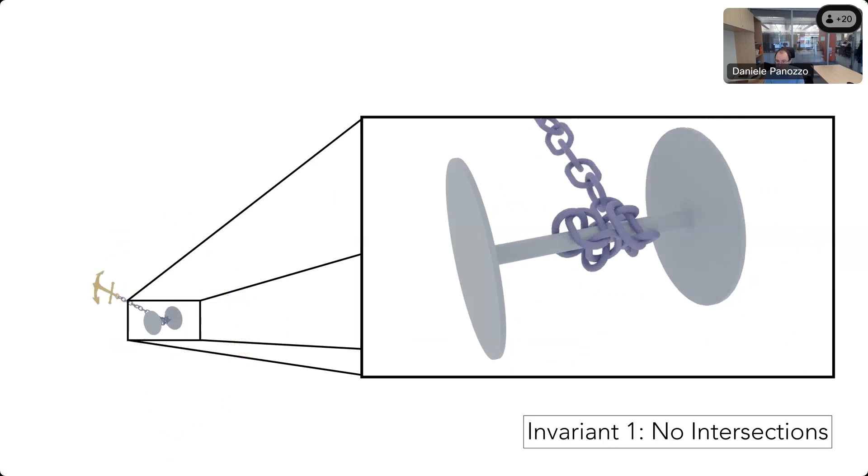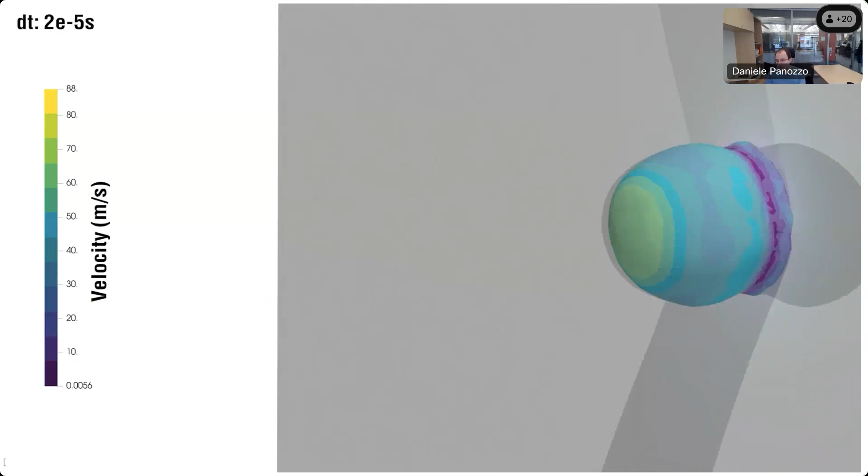The second thing is, for example, in this case, where you have this ball that hits the wall at high speed, there are very large deformations. Another thing you really want to make sure is that the geometric map of every element stays injective, or elements do not flip. So this is the second invariant.

And also in these simulations, what you're seeing here, and every simulation you see in this talk, we actually have a formal guarantee that elements cannot invert, even accounting for floating point rounding, and even if they are higher order elements.

The reason I want to push this is because there are many applications where this would be useful. This is something coming from the medical school at the University of Pittsburgh. This is an implant used to support human tissue. And here it's a simulation of this implant, which is sort of like this interwoven collection of fibers.

But what's happening here is that we're not using reduced models. This is a fully volumetric simulation where every individual rod is tetrahedralized, and the interaction between the fibers is figured out at runtime by our contact model.

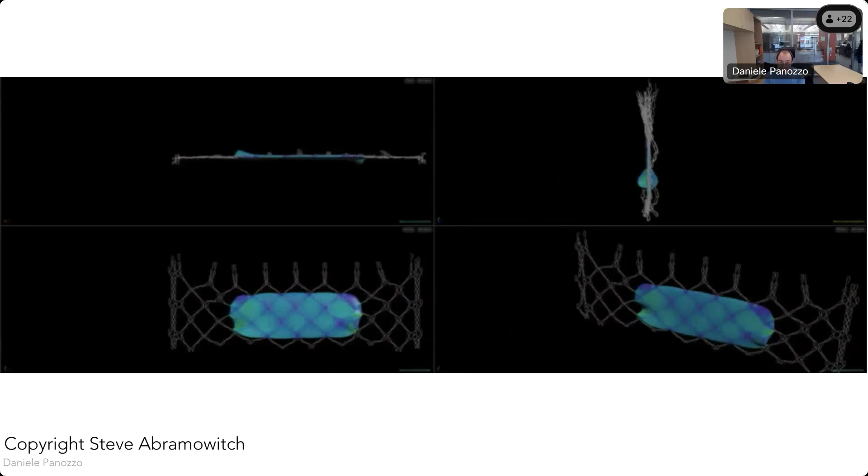The reason I care about this is because now, if we want to simulate, for example, how this implant interacts with soft tissue, we can actually have solid tissue, and now suddenly we can simulate the interaction between the two. No shortcut taken here. Accuracy is pretty high. I'm going to describe this in a second.

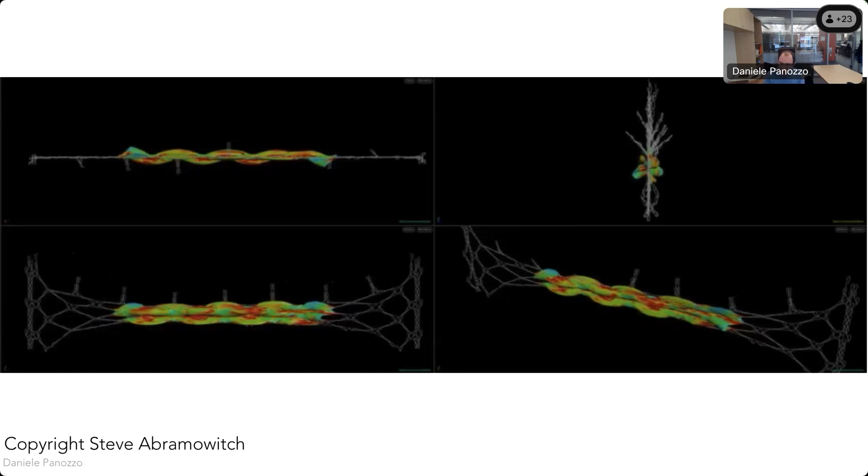The curious thing here is that, of course, it takes a long time. This simulation runs for days to simulate this expansion. One very interesting thing is that it turns out that in this specific simulation, the actual material property of the fibers is not so important. Most of the interesting behavior here really appears from contact. So it's a purely geometrical characterization of the material.

Here is another one. You see that we're going higher and higher in the craziness of scales. This is a simulation of the optical nerve of a pig under expansion, being slightly expanded. The way this was reconstructed was by taking a CT scan of an actual biological sample, identifying fibers, meshing every fiber as a tetrahedral mesh, and then simulating the interaction between all of these.

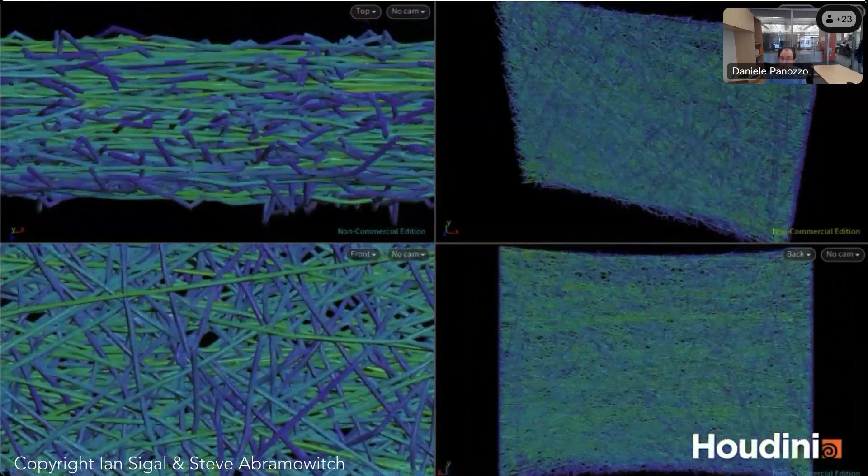Surprisingly, the simulation here matches the displacement curve measured from the Instron machine by less than 20% error, which is kind of remarkable given the complexity of the scene. This is an example of a material that is very hard to model with a continuum model, while it's surprisingly easy to model with such a system—if you have a way to model all the interactions happening here and deal very reliably with all the possible inverted elements or contacts appearing in there.

This is a simulation done with nonlinear elasticity, Mooney-Rivlin, and it takes, I think, a couple of weeks on a single workstation to run, just to give you an idea of the time scale. And this includes everything: mesh generation and simulation.

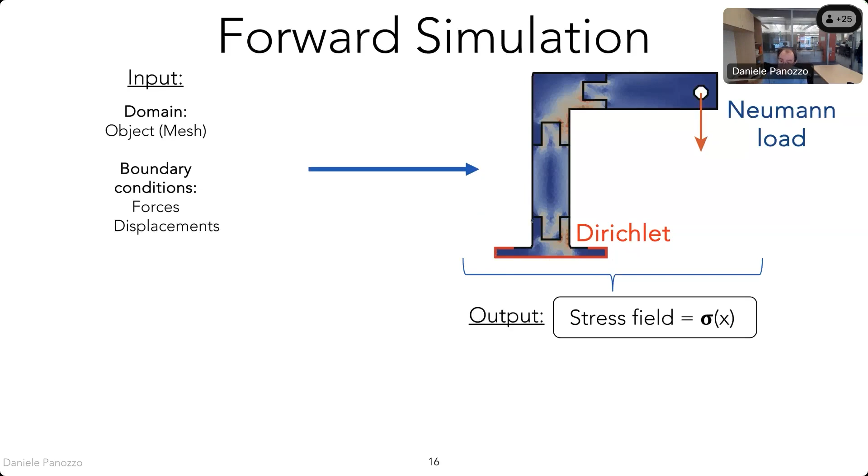Robustness is interesting not only for direct simulation, but also for solving inverse problems. Here we have four pieces, the one at the bottom is attached to the floor, and we have a load on the right. What I'd like to do is make it stronger, meaning that instead of just computing stress in a forward simulation, I want to figure out the different shapes so that stress is minimized. To formalize this, I want to minimize max stress, which can be relaxed in some way, for example using a p-norm as a smooth replacement.

Everything I've shown up to now, handling of contact, handling of inversion, nonlinear elasticity, needs to be differentiable for this sort of application to be possible, so that we can optimize things like max stress, which depends on the result of a physical simulation. So this is a PDE-constrained optimization, or an inverse problem, and everything I discuss today is going to be differentiable.

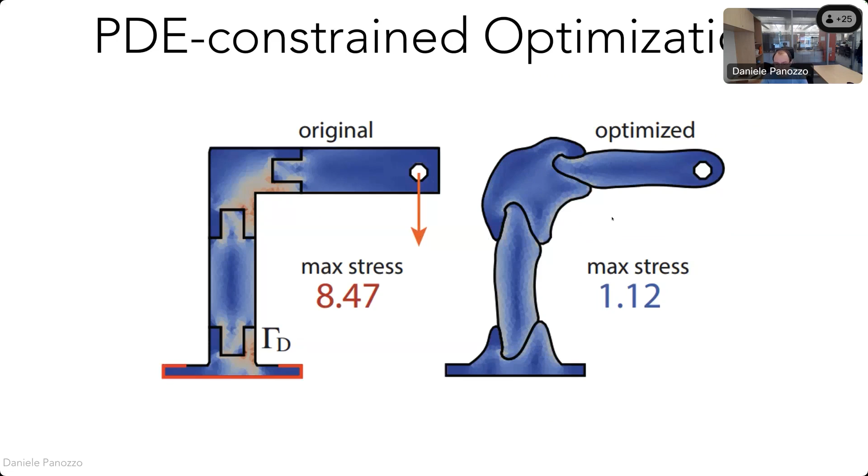What you can do with this is a lot of interesting things. For example, here you see that the interlocking between these pieces gets automatically optimized to become more organic. They start to look a little bit more like bones, which isn't a surprise, since corners tend to attract stress.

This can lead to measurable improvement in components. So this is really, if you want, an alternative to doing topology optimization, where you don't need to do thresholding, which introduces unbounded errors. Instead you can honestly optimize by solving your full space finite element problem and then optimizing the shape of your domain.

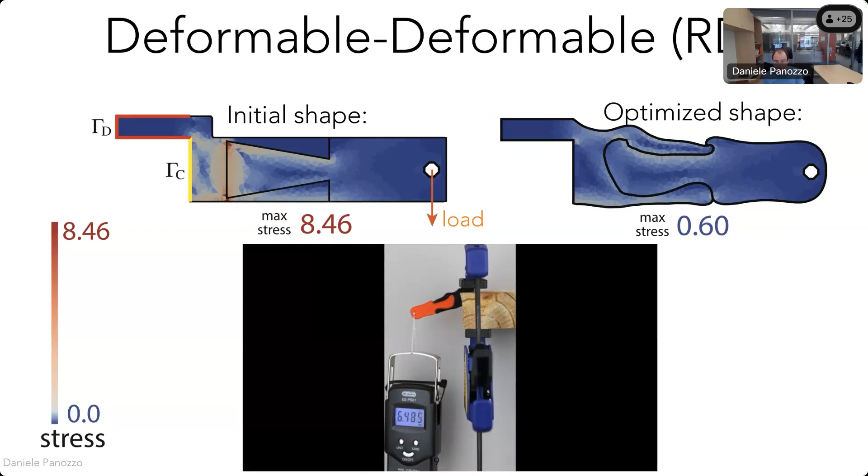Here are some examples. This is an optimization in 3D, just to give an idea of how the optimizer proceeds. It's trying to minimize max stress while the degrees of freedom are the geometry of this model. This is a full-blown 3D simulation with quadratic elements and nonlinear elasticity.

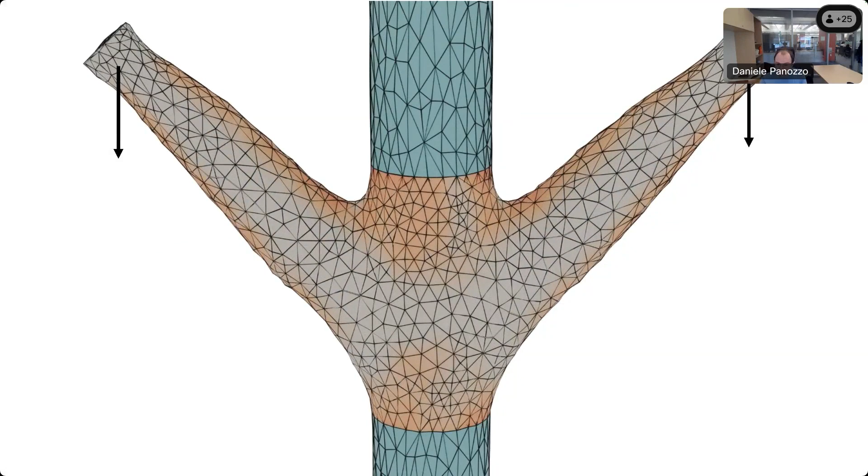Here is an example of optimizing a joint between two pieces under load, and you see that the piece nicely adapts to the other piece, trying to get rid of corners so as to reduce stress. If you want to do this at larger scales, you can imagine using geometry to control mechanical properties.

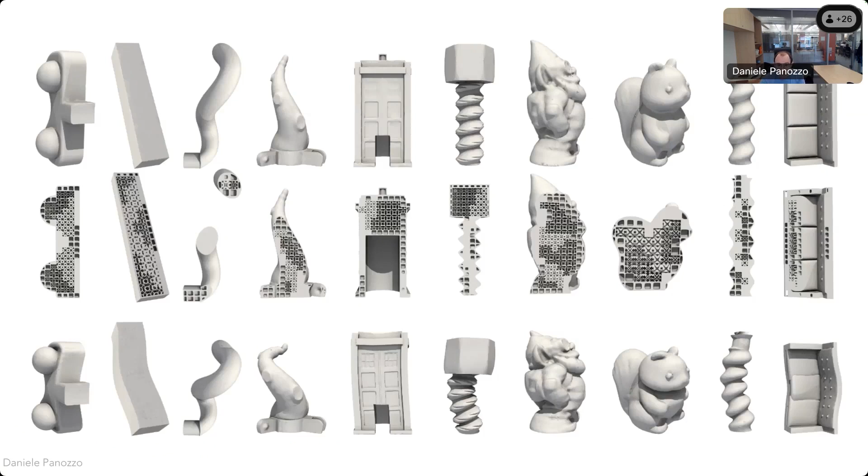We have possibilities to do this in 3D, so we're interested in solving this problem in 3D, and we're interested in solving it when time is present. So here you see a forward simulation of this block falling down, and the colors are von Mises stresses in the block. The goal is to see if we can minimize stress not only in one configuration, but over the entire time rollout of a simulation.

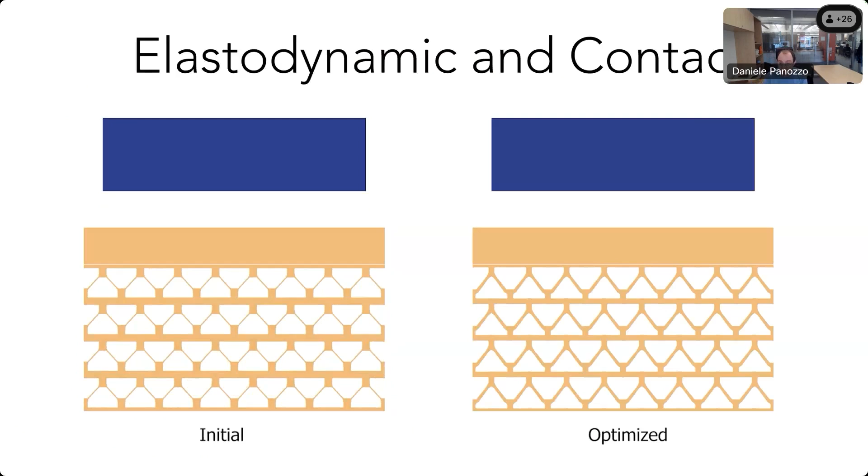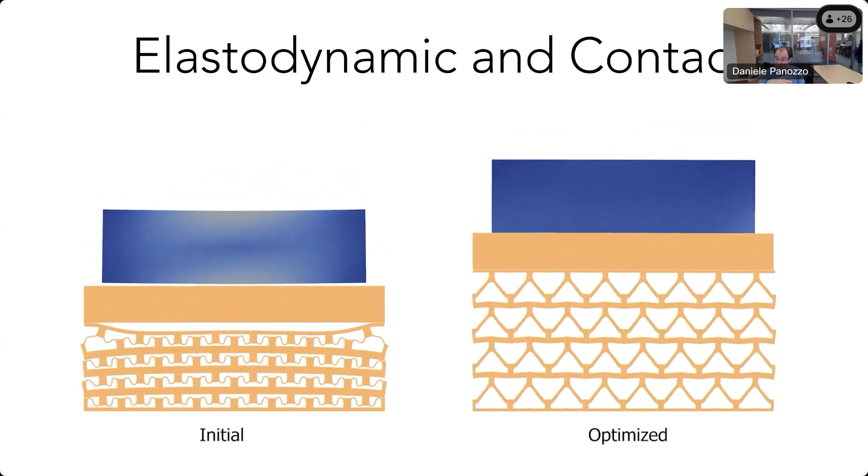And this leads to something interesting. It optimizes the shape of these pins, and now we get a different kind of foam designed to minimize stress, or if you want, to decelerate this block in a uniform way. This is a very strange material if you think about it, it has a constant force given as you compress it down. It's a very, very strange material, but it's ideal if your goal is to absorb shock.

If you're curious about this, we have a recent paper that describes the entire formulation for being able to differentiate through these problems, but it's not going to be my focus today. I'd like to focus on more geometric problems. A curious thing you can do with this is figure out material properties by only looking at how an object deforms.

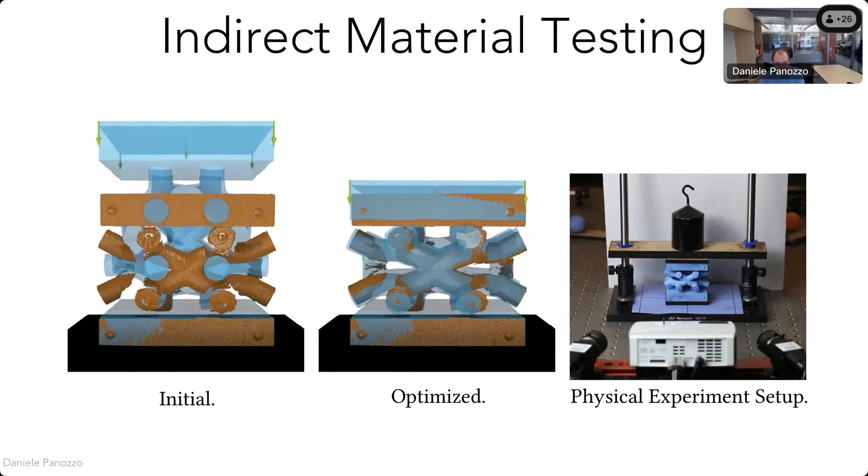So here we are applying some load to this object, we 3D scan it, and only by looking at the 3D scan, we can actually figure out what the material properties of this object are, which deforms in very complex ways because there are intersections and large deformations. So the goal of the lab is to make this process as automatic as possible, the forward simulation, for the purpose of being able to solve inverse problems.

Ideally, what I would like to have is something where you give me a geometry, you give me your boundary condition, someone is sitting on this chair, and I want to know what happens. If I'm not happy with it, I can change the geometry and automatically rerun the whole thing and see what's going on. No parameter tuning involved, ideally. If there is complex geometry, it should just work out of the box, maybe take longer, but it should still work without requiring extra effort.

If there is contact, you should just enable contact, it's a checkbox, and then your simulation should ensure that you get something that has no interpenetration and no inverted elements, no matter what.

Just to give you an idea, this is a simulation with 2.3 million tetrahedra, and there are around 5,600 contacts per time step to solve. So it's really a case where you want to have some guarantees on correctness, because otherwise the chances that some floating point rounding here and there destroys it are too high for this to reach the end.

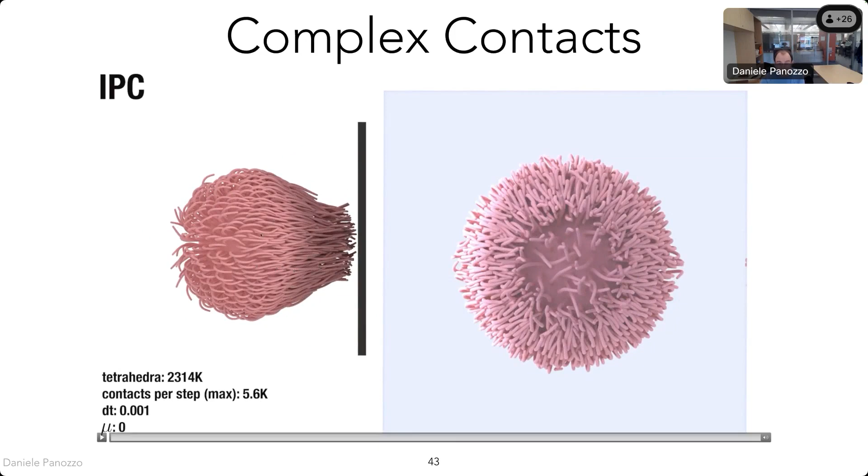So the goal is to get to a system that allows simulation of some PDEs. So now we can do diffusion, elasticity, very very simple fluids like only Stokes. But in general, the sort of tools and ideas built here could be extended, and I would love to extend this to more complex PDEs. Ideally, no parameters except the ones that are really needed, like material properties.

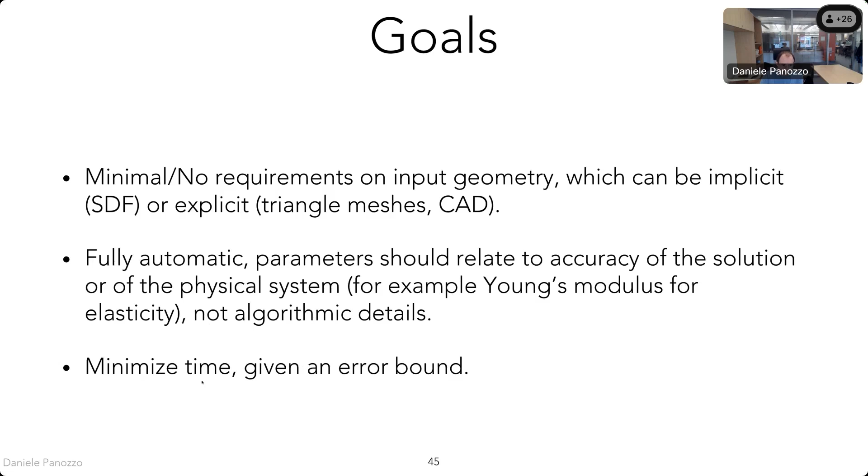And the overall goal is to minimize time given an error bound and not have failures. An observation is that in general this is difficult. It's a problem that involves geometry. How do you create meshes? How do you model? How do you detect contact? Which numerical method do you use? And so on. One of the things that I argue for is that this should really be solved holistically, meaning that you treat all of these as a single challenge.

The input is a geometry, this is some boundary geometry. The output is an evaluator for the PDE. Everything that happens in between should be treated as a single problem, because maybe by saving something in one place or another, you can simplify your life.

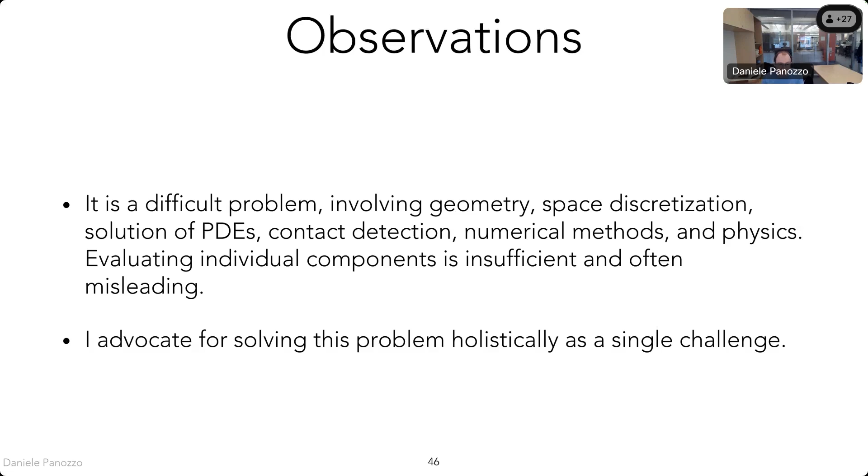So in the lab, we work on a lot of topics on these that I would like to mention briefly. One is what kind of elements do we use? And after looking a lot, we sort of converged that tetrahedra are the best in terms of efficiency. If you're curious about these, or if you have examples that this is not true, I would love to discuss it with you later on.

How to do time integration, and then how do you create meshes? How do you map boundary conditions from the input to the mesh automatically? How do you deal with contact? How do you deal with degenerate elements, which turn out to be not such a big deal if you're okay changing the solver code? And then what can you do with it? How do you accelerate it? For example, use curved meshes to reduce the number of degrees of freedom, and applications.

So I cannot talk about all of these. So today I would like to tell you about three things. I would like to introduce this new method, a new way of simulating time-dependent simulation using a formulation called incremental potential, which I believe has huge advantages over the more traditional approaches in terms of robustness, while producing in most cases exactly the same result. So I believe this is a small change, but a very powerful one.

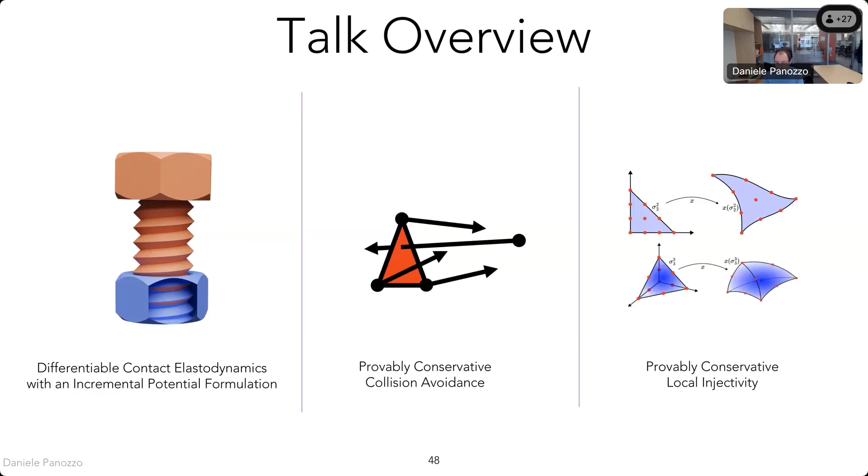Then I would like to tell you about collision detection and avoidance, and how we can do this with formal guarantees that account for floating point rounding. And then similarly, I would like to tell you about how we make sure that every element does not invert, even when they are higher order, and also this is done with provable guarantees. So let's start from contact. This has been published in quite a few papers.

I'm going to give you a very short high-level overview, which I believe is enough for understanding how it works, but I'll be happy to dig into more details later on.

We discovered this while looking at how people usually deal with contact. I want to briefly tell you about contact, and then go back to elastodynamics. The usual way people deal with contact is by taking time steps, figuring out what's happening, and then, after you violate your contact constraints, trying to reinforce them back. This is by far the most common method because it allows you to use implicit time integrators.

The advantage is that it's very efficient. The problem is that after you violate your constraint, it's very, very difficult to go back. It might not even be possible. Exactly the same thing happens for inverted elements. Whenever you have an element that inverts, especially if it's higher order, usually you figure out it's inverted after the fact, and many methods try to bring it back to a valid state. But bringing it back is much harder than not letting it happen in the first place.

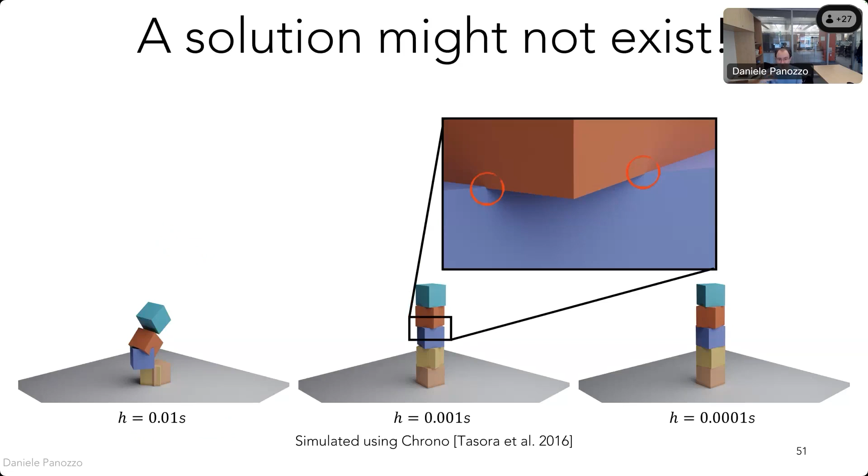So the problem with these methods is that now you are sort of stuck, depending on which parameters you pick, you might get different results. For example, these are a few cubes stacked together, and depending on the parameters, they might collapse, they might self-intersect, or they might be fine.

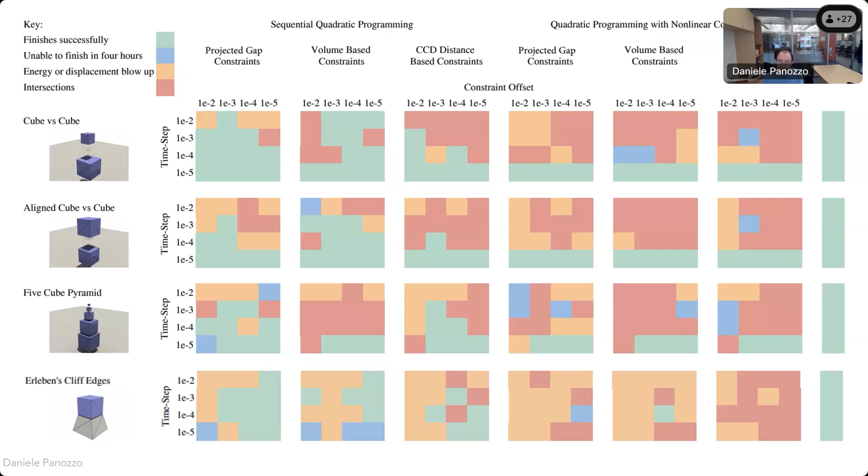So we started in this quest of figuring out: can we have an algorithm where no matter what you do, no matter which parameters you pick, there are never going to be intersections? Of course, if you pick a massive time step, you're going to have huge errors in your physical model — you might remove a lot of energy or add a lot of energy — but it should still not have intersections.

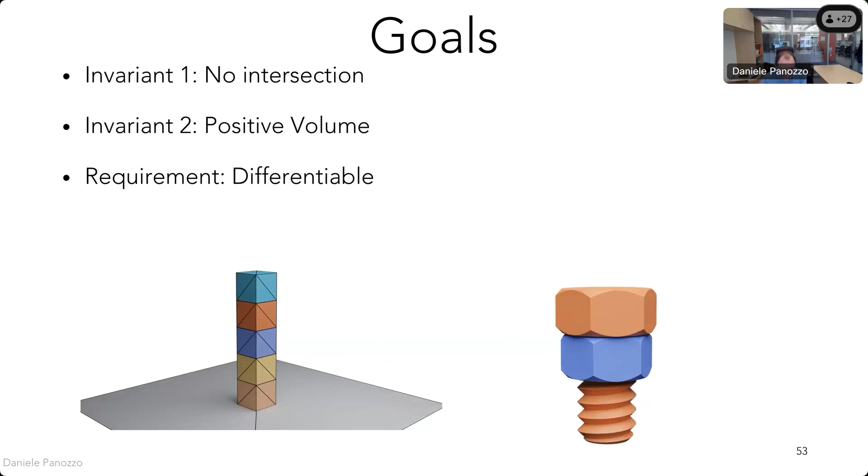In addition to this, we want to have no intersection at all, we want to have positive volume for every element, and we want it to be differentiable. With these constraints, we came up with a new formulation, which I think is very exciting, and I think it could easily be adapted to other physics.

Before I go to the formulation, for contact specifically, one way to solve the problem would be to solve collisions one at a time, which is something that is typically done when explicit time integration is used. The issue with this is that the performance is terrible, because your time step becomes smaller and smaller as you have more and more collisions.

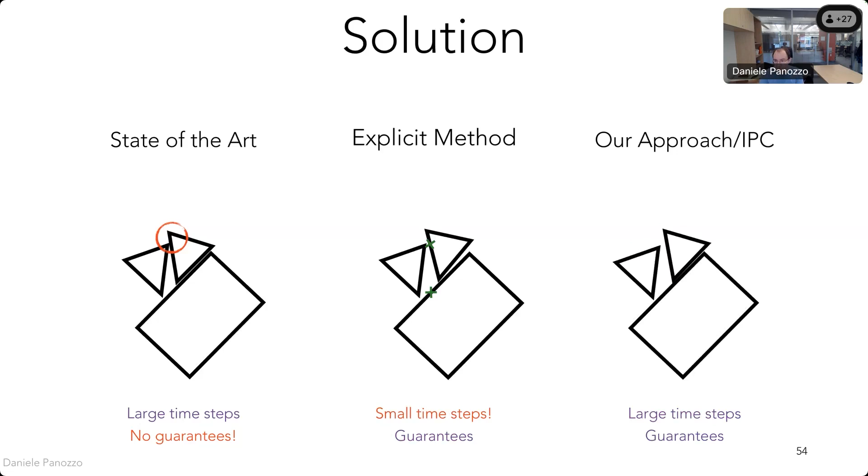So for a very complex scene, it's really impossible to do this computation — it will take too long. But on the other hand, you have guarantees. So the question is, can we have something which strikes a balance? It allows us to take large time steps, and it also guarantees no intersections. So the idea is the following.

The problem with this is that whenever you're trying to find a solution of a system, you might not be able to find one. And if there are constraints, you might not be able to find one that satisfies the constraint exactly. It might satisfy the constraints numerically, but that's still not a guarantee.

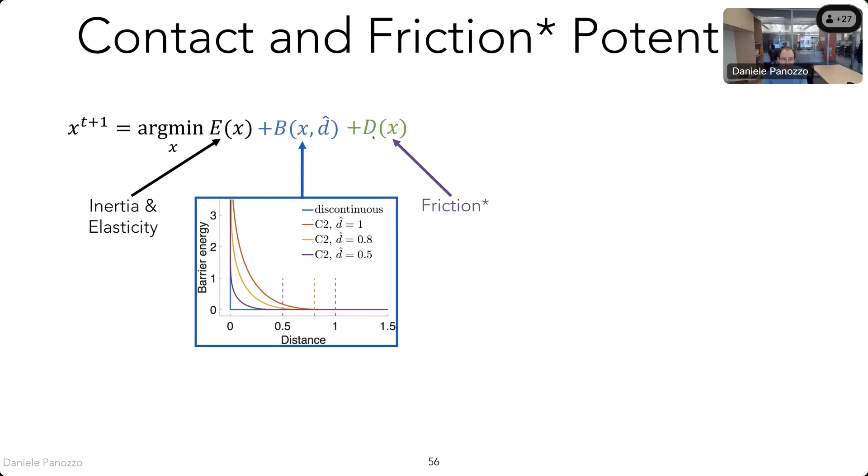So now, if we want to compute the new time step, we need to minimize an unconstrained energy. And to do this, we can do it, for example, using Newton's method. Newton's method for minimizing an energy, not to find a solution of a system of equations.

But the powerful thing here is that we can now, in the line search of Newton, ensure that the constraints are not violated. So the algorithm will be: you're at a certain point in your system, you want to find the next configuration at the next time step. This involves minimizing a nonlinear energy, which can be messy and complicated.

And this energy, you want to minimize it, so you're going to take steps. And now the step, of course, might actually point toward a direction where the energy goes up. Like, for example, if you have a barrier for contact, there could be a point where it's infinity.

But now the only thing that we need to do is to make sure that if we try to take a step that is not valid, in the line search, we're going to take a shorter step. And this also applies for inverted elements. If an element tries to invert, we are simply going to take a shorter step.

So the advantage of this approach is that the computation of the direction where you move can be done in floating point, but the actual check of what is the maximal step that you take can be done with exact computation. And in this way, having only to check for how long is the step, it turns out that this can be done very efficiently.

What is cool here is that this directly accounts, without heuristics or anything else, for both refinement needed for inertia, elasticity, contact, or friction. So we use this criteria, picking the mesh at every time step that minimizes this potential, in our adaptive remeshing method.

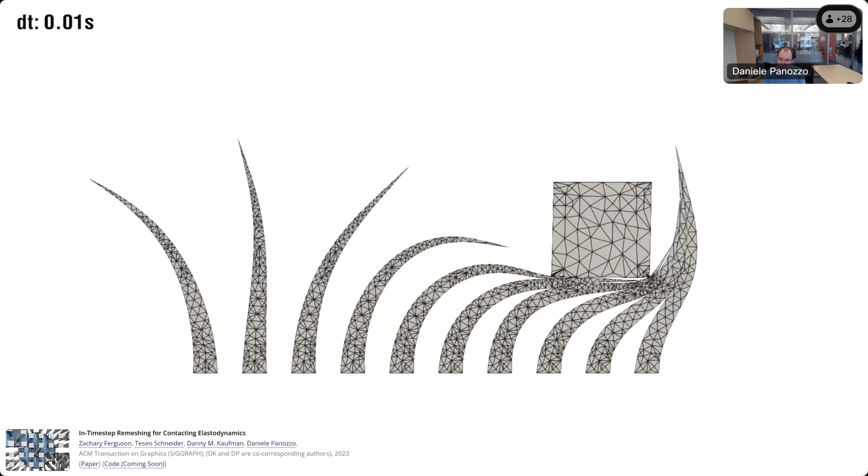And we show that this is quite remarkable. It creates meshes that have very few degrees of freedom, only selecting the ones that are really needed, making this something that can be done in a distributed system, leading to major speedups.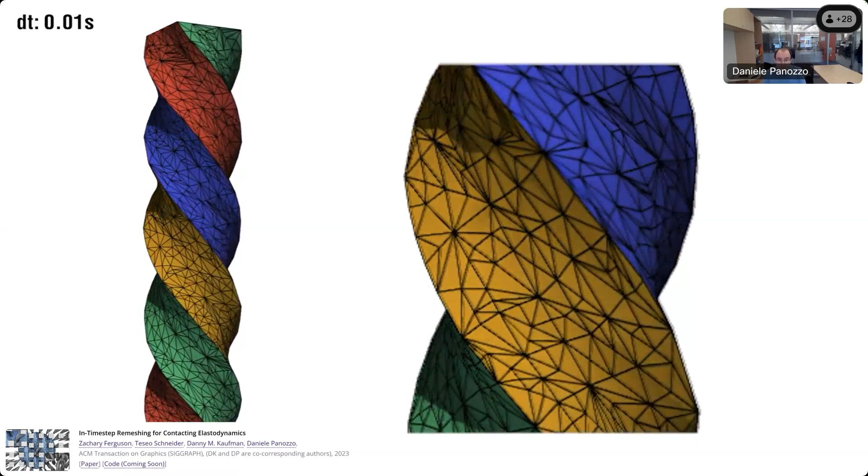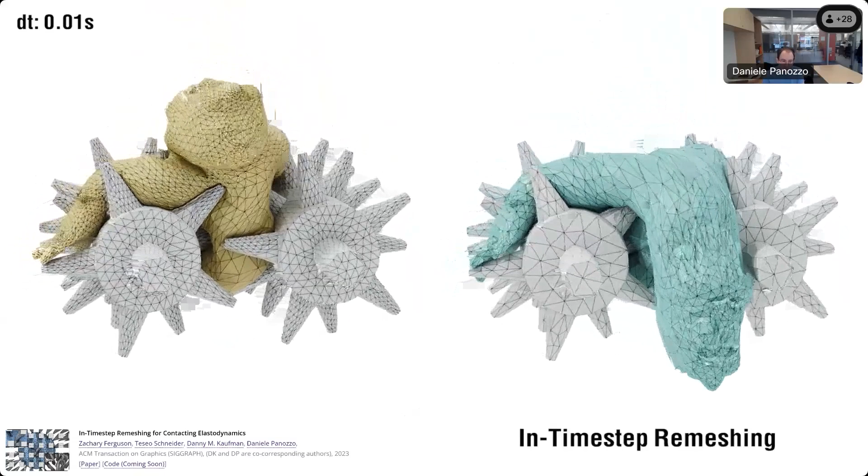It's something that Max, one of my students, is interested in, and I think this is something Max and Sanyo might have discussed at some point. But I think this is interesting because now it's very easy to decide if you want to refine a certain region of a mesh or not, or if it's okay to coarsen, because you only need to check if this energy is smaller or larger.

Here is a collection of examples where this remeshing is happening, showing that it makes a big difference. Being able to refine correctly actually dramatically changes the rollout of a simulation.

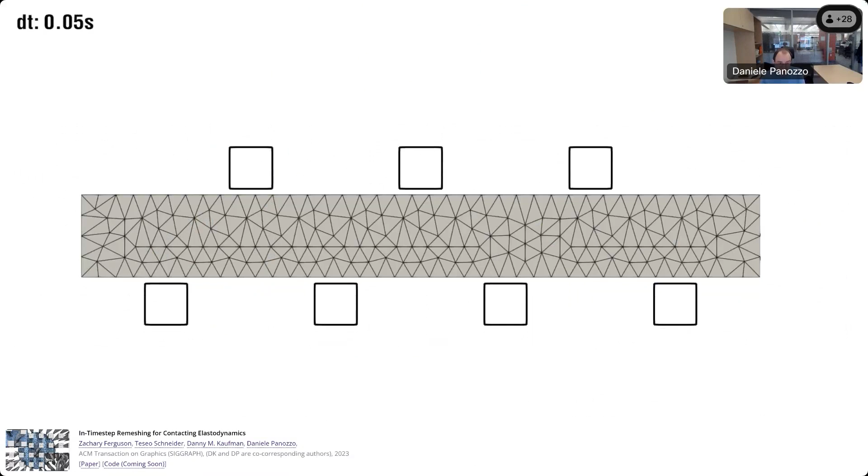Especially for nonlinear problems. Here is a nonlinear elastic problem. You see that on the left, without remeshing, fixed mesh, and on the right, with adaptive remeshing, the actual result is completely different after some time.

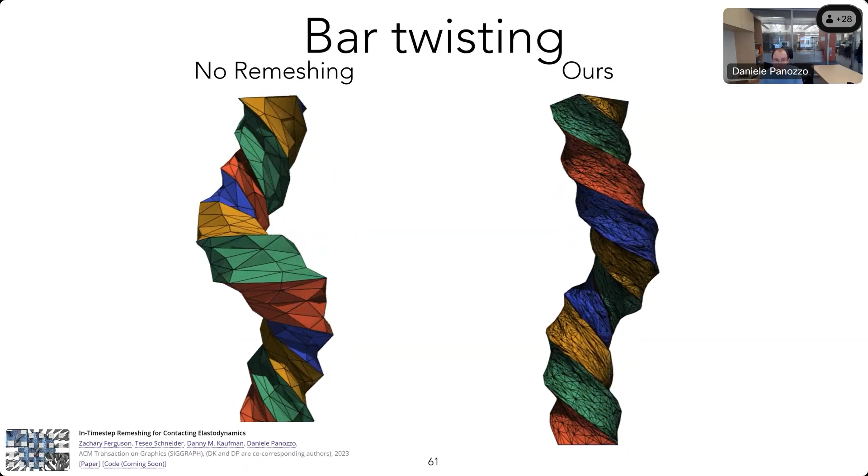Okay, so what are the difficult things here? The difficult things are deciding what to do in the line search and deciding how to integrate these potentials, so that we can then use them in the Newton method. You need to be able to do integration of this potential for computing the descent direction.

And you need to be able to do exact checks on the line search to make sure that the energy is really decreasing, and you're not hitting these points where the energy is infinite. So the first thing we're going to look at is how to deal with this for contact.

So this is an example of this potential I was mentioning before. This is an example of a potential from this point to the surface. You see that it's doing what you'd expect: as the point gets closer to another object, it adds some force, pushing it.

And you can make these barriers as tight as you want. You can push these curves more and more to the left. The more you push it to the left, the closer you get to the more classical discontinuous contact formulation. The disadvantage is that you get problems that are numerically harder to solve, so it needs more iterations.

If you're curious about this, we have a paper on arXiv that explains how this potential is written down. And we have an entire implementation, if you're curious about trying it, that only computes this potential and makes it reasonably easy to integrate into other FEM systems. But the key thing to figure out is how do I detect when there is a collision.

And so what we did was take a bunch of simulations to create data sets of possible collisions with polynomial systems. We use Mathematica on all of them to do algebraic solutions to find what are the real roots, so that we have ground truth to actually check how methods perform.

And this is very dangerous, right? Because you could at any point have a complete failure in your simulation just because you completely missed two objects touching. One way to fix this, which I believe is how many of these actually work in practice, is that you can tune parameters for these floating point methods to be over-conservative. So now you have methods that very often, even if there is no contact, tell you that there is contact. But this is because they have massive numerical tolerances in their solver to make sure that they don't miss it. So in our data set, there are no false negatives, but this doesn't mean that it's not possible to construct cases where they fail.

So in the paper, we actually have counterexamples for all of them, which are synthetic, to show that you can break them.

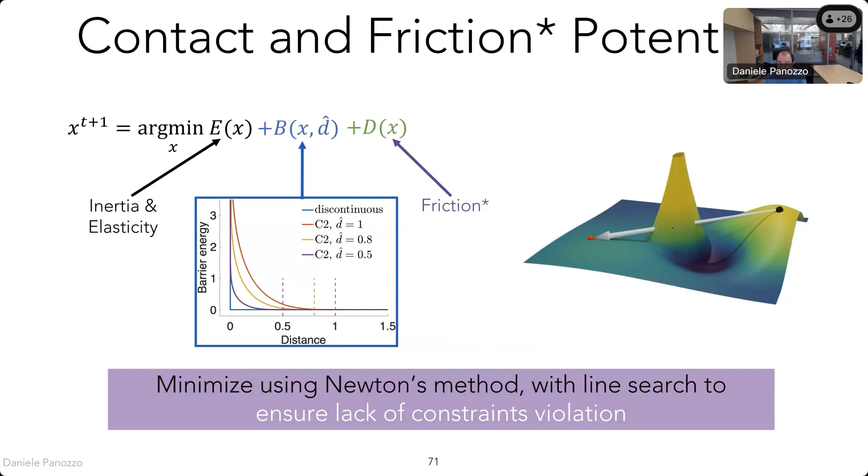Otherwise, you're going to have some condition in the line search that are not taken into account by the numerical solver, and you might get stuck, which is very likely what was brought up before by one of the questions, where if Newton is taking tiny, tiny steps because he cannot make progress, what is likely happening is that the condition you use in the line search, which is no contact, is not properly accounted for in the potential, which is not integrated correctly to diverge when there is a contact in the discrete, after it's discretized. This is very likely the reason why some of these methods take very small steps.

So this is again very tricky to do this quadrature correctly. I refer to the paper for the details of how it's done, but the high-level pitch is that we use the collision detection to find the closest point, and then we change quadrature so that that point is one of the quadrature points, so that the discrete quadrature also diverges in the same way as the continuous counterpart.

And this is absolutely crucial. Without this custom quadrature, the method does not work at all, or it does work, but it's very, very slow at converging.

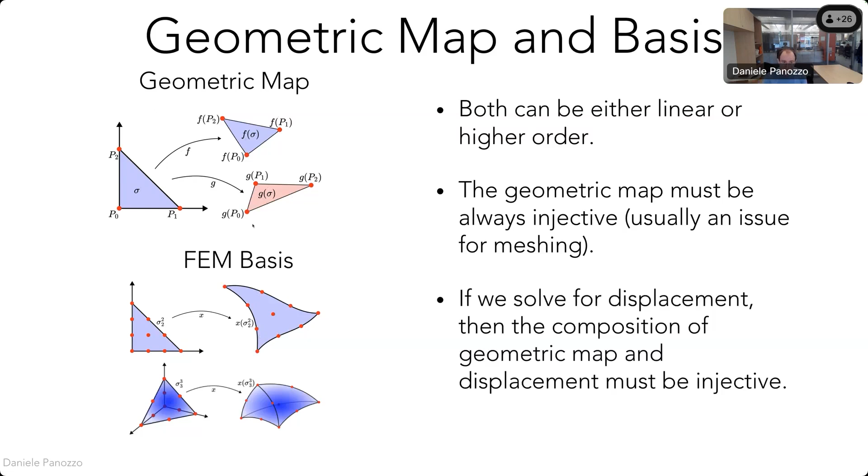If you are interested in using this for something that doesn't change the mesh, then it's enough to use this to validate that the geometric map is locally injective once and for all at the beginning. But for elastodynamics, it's actually more tricky because the solution changes the geometry, so this check needs to happen all the time as we update the solution.

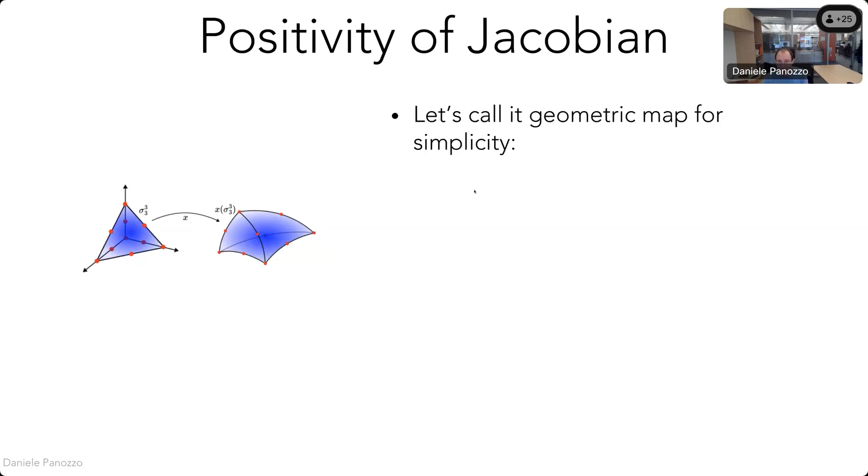So the formulation in general is: you have a nonlinear map from the reference domain to your element, let's call it X for simplicity. And what we want is to enforce that the Jacobian of this map, the determinant of the Jacobian of this map, is positive everywhere on this element.

Everywhere is a strong word, because if it's linear, it's easy, you pick any point and it's fine. But if it's not linear, this is really something that has to be tested over the entire element.

So many finite element codes, especially commercial ones, don't do this. What they do is only test this condition at the quadrature points, because anyhow, the evaluation of whatever function diverges when the element inverts is only evaluated at the quadrature points. So it leads to something that often doesn't crash. But checking it at the quadrature point doesn't make it right, because you're still going to have inversion somewhere else.

And actually this is really a huge problem. After we noticed this and started trying to do some statistics, we took all simulations that we had in PolyFEM that use higher order elements for elastodynamics, and we noticed that in all the simulations with higher order elements, now that we have a proper check, it actually detects invalid elements in all of them. So we were not able to run a single simulation without invalid elements until very recently, and we were not even able to check if these were invalid or not.

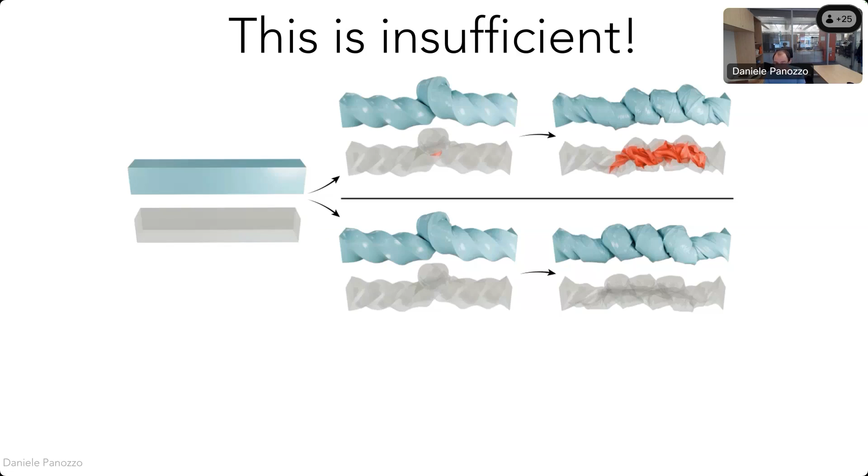So this is one thing: it's absolutely not enough to check on quadrature points. You need to check everywhere.

There is this paper that you might be aware of, using GMSH from Johnen in 2014. They have a method for checking positivity, but unfortunately that method is not conservative because it doesn't account for floating point rounding. So it's much better than testing at quadrature points, but it's still not giving you a guarantee.

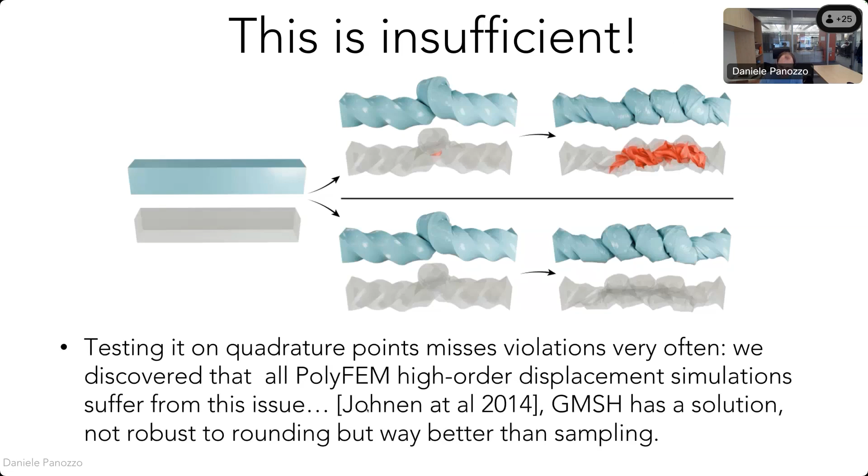In addition to this, even if this method was actually able to give you the correct answer all the time, this is still not enough, because we are completely ignoring time.

So here we have a higher order triangle, and you see that the nodes are moving around. You have a beginning of time step, which is valid, an end of time step, which is valid, and you have an inversion in the middle. So actually, this trajectory is not a valid one. It's really not sufficient to check after a time step—it needs to be done along the entire trajectory if you care about having a fully valid physical trajectory.

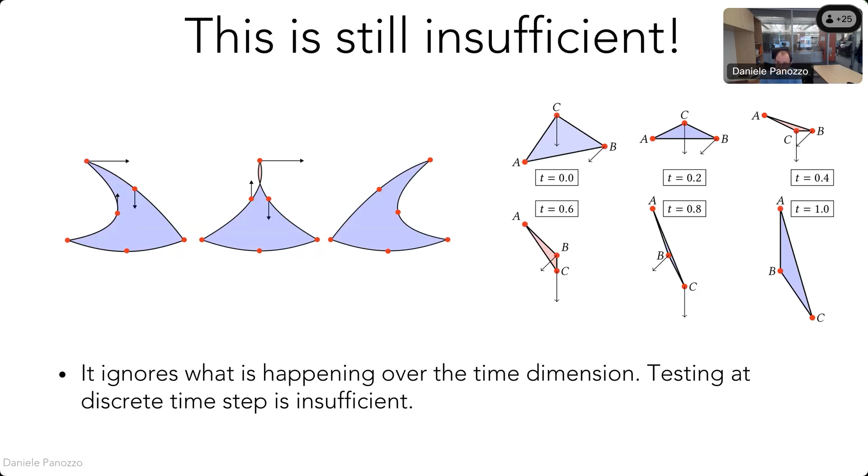I was curious if this can happen only with higher order elements or also for linear, and the answer is you can do it for linear too. It's very unintuitive, and I don't think it's worth spending a few minutes to understand, so I just hope you trust me: it's possible with a linear trajectory in a linear triangle to get it to flip twice during the trajectory.

So how do we do this? The idea we propose, which in retrospect is a very obvious one but I couldn't find it anywhere else, is that we can take a triangle and convert it into a prism where the other dimension is time. If we ensure positivity of the Jacobian over the entire prism, this gives us an answer which is conservative.

This is a generic construction that can be applied to any kind of element, which just adds an extra dimension. Then you can use something similar to bisection as what I showed before. However, this is considerably more difficult to do because now you have this extra time dimension that needs to be handled differently if you want something that converges in a reasonable time.

I'm not going to go over all the details here, just the high-level pitch: we are using the basis conversion that Johnen et al. proposed to do all of this in Bezier form, because the inclusion functions are much tighter there.

We have a very important step: instead of trying to be accurate at runtime, where it's very expensive, we manage to do a large precomputation of the algorithm using SymPy. It's all analytic. Then at runtime, we have a tiny expression to evaluate that can use intervals to account for rounding errors. So the algorithm is a sort of Frankenstein—mostly running before, in a precomputation, and then at runtime it's just using a table. But it turns out to be fast and provides bounds, and the algorithm is quite tricky.

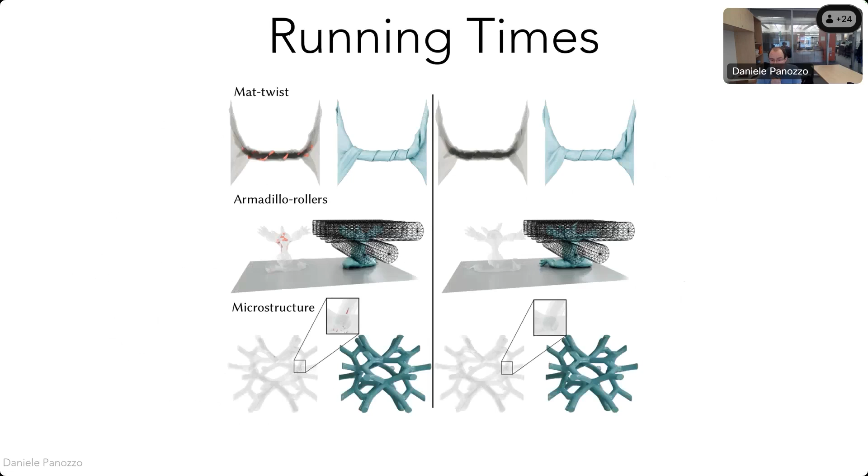I'm really running out of time, so I cannot go over the details, but I can show you some simulations where it does work, and some timings to give you an idea of how long it takes.

This is static check only. Similarly to before, you need to be careful here because having this exact check tells you how far you are free to go. But now you need to make sure that the direction is also aware of these potential spikes that are happening.

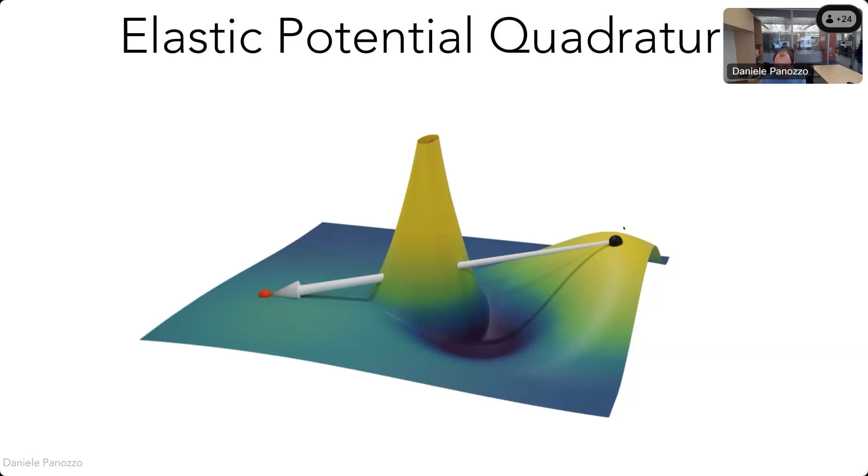So the quadrature also needs to be done carefully. The reason why we cannot do exact quadrature is because in many of these nonlinear energies, there are logarithms appearing. So it's impossible to have a standard quadrature rule that does it exactly.

So what we found is that one way to do it is to use the hierarchy constructed by our algorithm to figure out if the element is positive or not. We can also use this hierarchy to derive automatically a per-element quadrature rule.

And we use this quadrature rule for integrating the elastic potential. This sounds like a crazy thing to do because it's very expensive, but it's actually not.

Few elements, like a tiny percentage, actually require more than one level of subdivision or any level of subdivision at all. So in practice, this has a negligible effect on running time overall in a large simulation.

But this is crucial because not doing this again leads to many small Newton steps, because your line search is inconsistent with the energy, and so it's going to block it and not allow it to proceed. With this, it's much better, and I just refer you to the paper for more details.

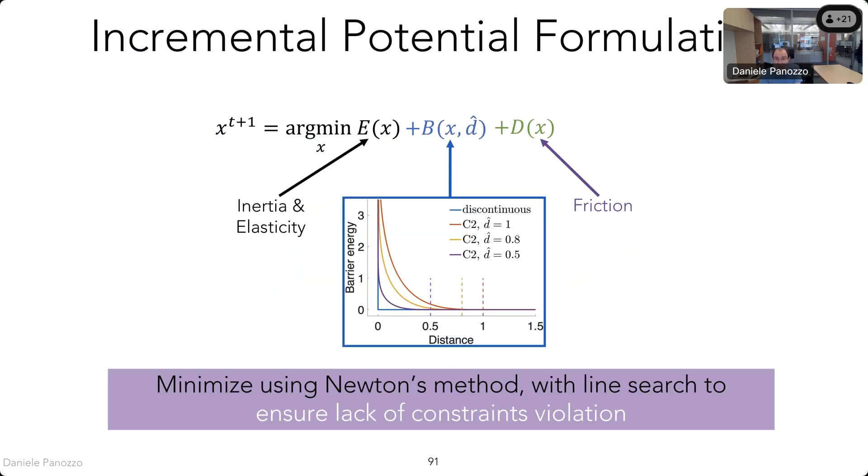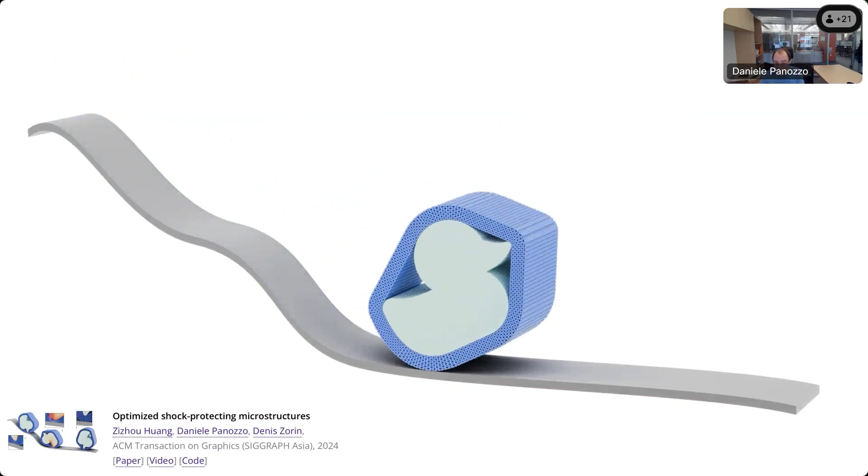So there are tetrahedra all over inside this foamy thing, and the object is falling down. You see that as it falls down, there is a lot of stress on this poor duck.

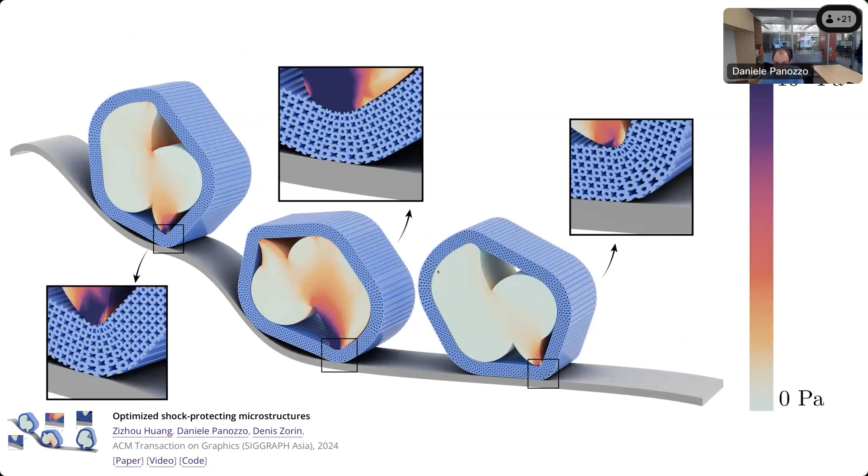And so we can use our differentiable simulator to change the geometry of this foam, so that we can optimize it to better absorb shock. And we are getting this other foam, which is much better at absorbing the shock.

You can already see it visually that it deforms much more than the other one. And this actually reduces the stress on the duck by around 72%.

And again, what you're seeing here, everything is meshed as a volumetric mesh. So there are millions of tetrahedra here and inside the duck.

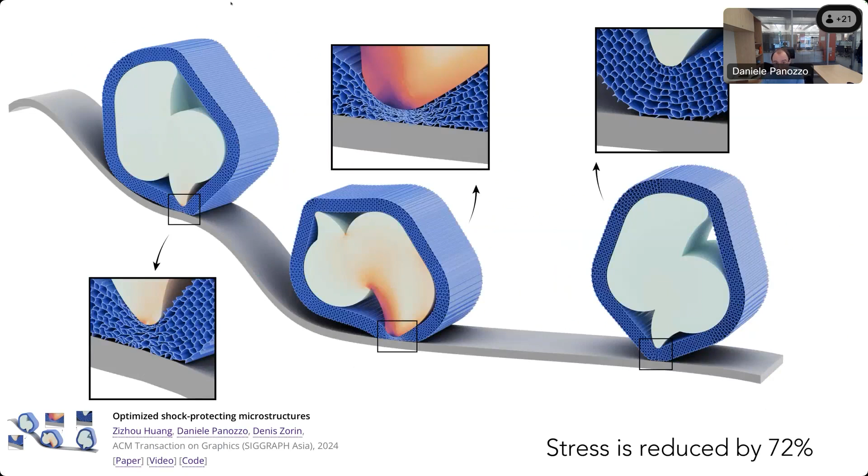And then this is forward simulated using this approach, ensuring that elements do not invert. And they really do try to, especially in these configurations, and there are no self intersections.

So this is a more Christmassy take as we are getting into the season. This is a softer one. And to conclude, I would like to just show you that this is not only in simulation, but also matching physical experiments very closely.

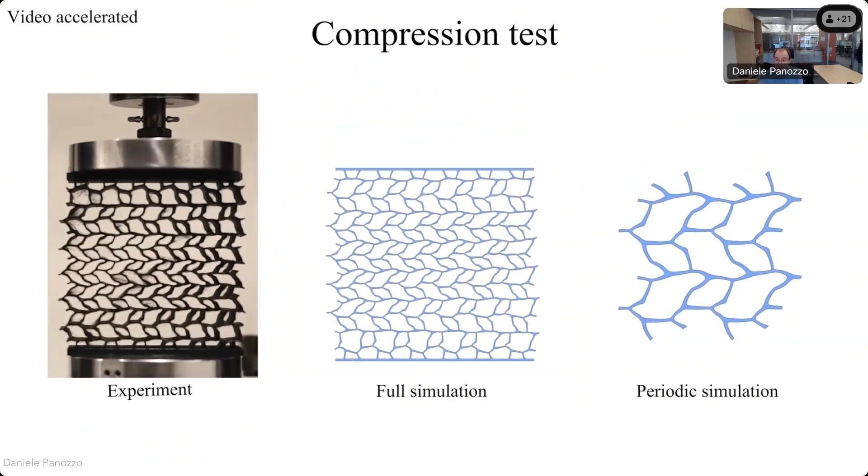So we did some mechanical testing on these, more details in the paper. We are off by 10-15% on the displacement curves, strain force curves, on these very complicated setups with contact and high displacement.

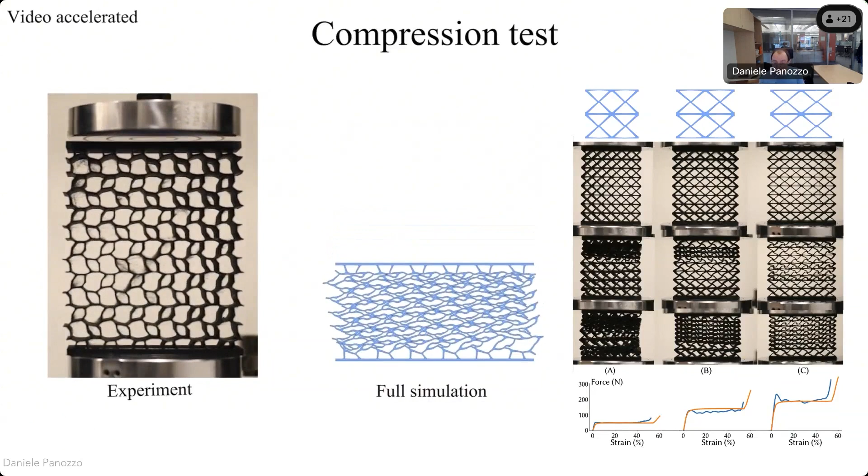I have a question on how you perform the positivity check for the Jacobian. So you're doing the Bernstein expansion, correct? And you check to see if you have any negative coefficients. Yes. If you have negative coefficients, do you do any further checks to see if it's actually negative, or do you just assume that it is?

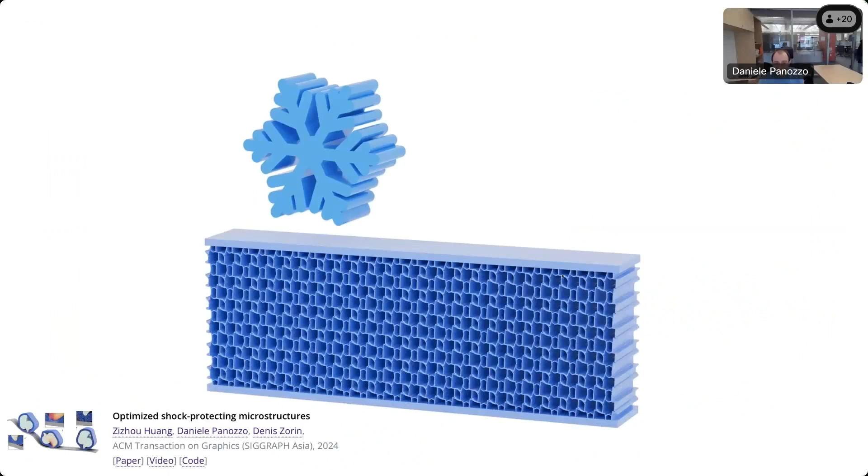So we are going to continue to refine until we find an entire interval where all the coefficients are negative. So we can be sure that there is an inversion there.

And do you have some maximum level of refinement you go to? Absolutely. So there is a maximum level of refinement, which is a tolerance that can be configured. And after this, if it's not possible to resolve it, we just decide and give a conservative answer, but it's very likely that there is an inversion there. Okay, thank you.

Can you prove that you need a fixed number of refinements? No, so what we can prove here is that our code will always give you a conservative answer. So if there is an inverted element, we are always going to tell you that it's there. We cannot say anything about if it's not there.

Okay, all right. So if it's not there, we don't know. We might be able to tell you that it's not there or not, but you can decide how accurate you want to be with this check with one parameter. And this parameter trades off how accurate you are with how long you are willing to wait.

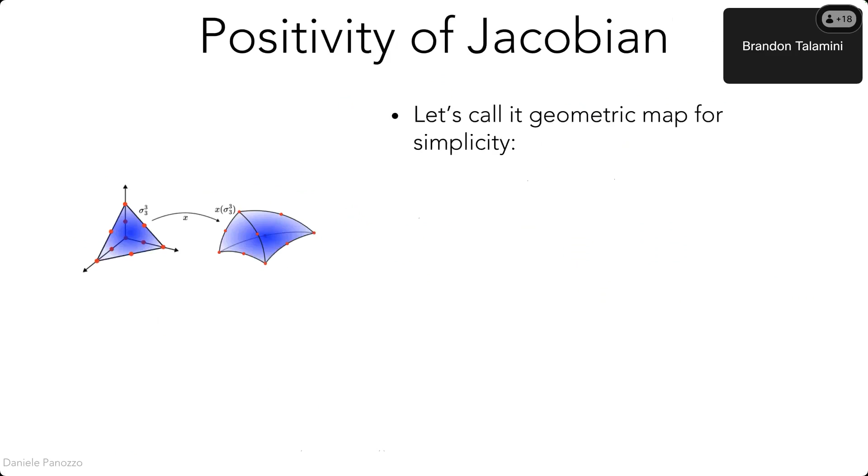I want to understand. So the minimization thing, of course, gives you a framework where you can know part of the robustness because you know there has to be a minimizer, and it's a way to search for it to know that you have a valid configuration and it's the best one, the correct one. But what I didn't understand fully is how. We've seen these problems like what Mike Puso was asking about, where sometimes your solver steps can be very small - they're not really Newton steps necessarily, but your nonlinear solver steps can be very small because you have these barrier functions that grow very fast, or like you said with the neo-Hookean, the log terms, and very small...

distortions of those elements quickly lead to very big growth in energy. So I was trying to understand - it seemed like something that you were describing about changing your quadrature in both of those cases - how does that make your nonlinear steps larger? How do you get around that, what is the key connection there?

Yeah, so let me try to describe this in a different way, because I really think this is a crucial point, and it took us quite a while to figure this out. So in general, technically, this line search check would not be necessary, because you are minimizing an energy, so if you're taking short steps, technically you don't need it. It should not happen - you should not ever pass through a point where the energy is infinite. Sure, yeah, if you are willing to take small steps, I agree. In principle, that would save you, right? Right. So the reason why you are adding this is because you want to use this quadratic approximation, or whatever else you are using, better, and you want to take a longer step. Yes. Okay, so let's go back for a second - why do we have this line search?

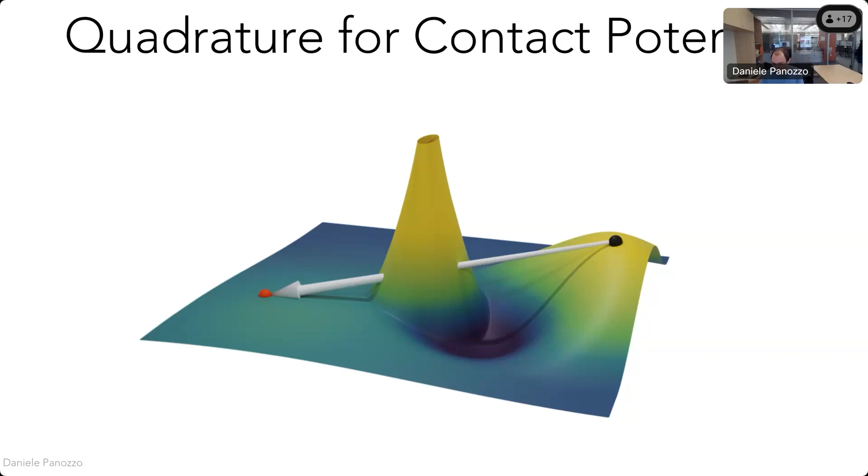Well, we have the line search because since we are using this quadratic approximation, that approximation will not be able to capture a point at infinity - it's quadratic, it cannot do it. Sure, yeah. So what you're doing is adding the line search to still be able to find these points where the energy goes to infinity, so that you don't cross them. Now it's absolutely crucial that as your point moves closer and closer to this point at infinity, your quadratic approximation will be able to capture it better and better as you get closer, because it becomes easier. So what is important is that whatever value you are using for computing your quadratic approximation needs to be consistent...

with the condition that you use for the line search. So to rephrase, the discrete thing you are using to compute your gradient needs to integrate and go to infinity if the condition you use for the line search tells you there is a point at infinity there. So the two things are really, really related. You don't strictly need the line search - you are adding it because you want to allow bigger steps, but you still need to make sure that whatever you're using to compute your step is aware that there is a point at infinity there.

And yeah, okay, I see that. It's just okay. I don't want to take. I'll have to go read your papers.

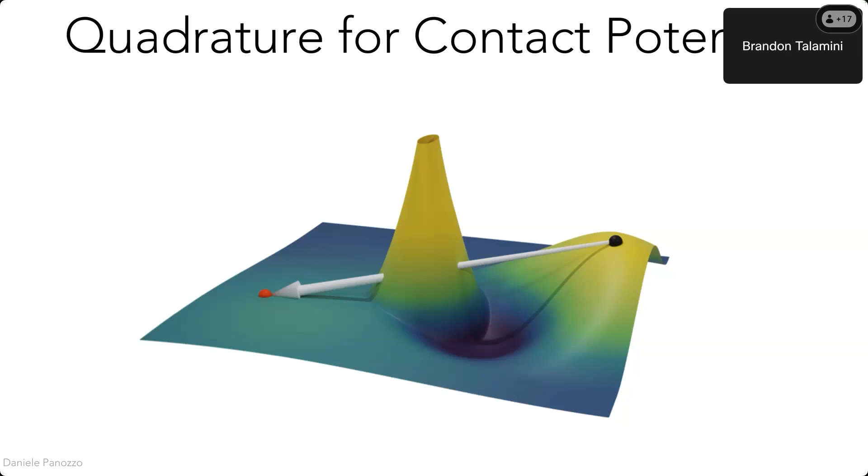So what I'm saying that is absolutely lethal, and I saw other codes where this happens, is that you say, well, I don't want it for contact, right? For example, you say, okay, I don't want to have contact, so I add something to the line search, but then the way you compute your gradient is actually not aware, is not exactly consistent with the line search. And this is absolutely lethal, because then you're going to get a direction which points you toward this point at infinity, and this is going to be stopped by the line search. And then it's going to continue to try to go there because it doesn't know that there is a point at infinity there. Okay.

And this is really something which is very hard to debug because the inconsistency can be very small, and this really dramatically slows down whatever algorithm you're using there.

The way we do it actually is that we don't do Newton for these, but we use a cascade of robust solvers. So what we do is we first compute the descent direction with Newton, and we try to go in that direction. If it's too small, we do it again using Newton projected to an SPD matrix, because sometimes it helps. If this does not move, we use gradient descent. And if gradient descent does not move, we do stochastic gradient descent. We do this in this hierarchical way, and this is what really gives it robustness, because after you shake out of this bad minimum, then it can move away.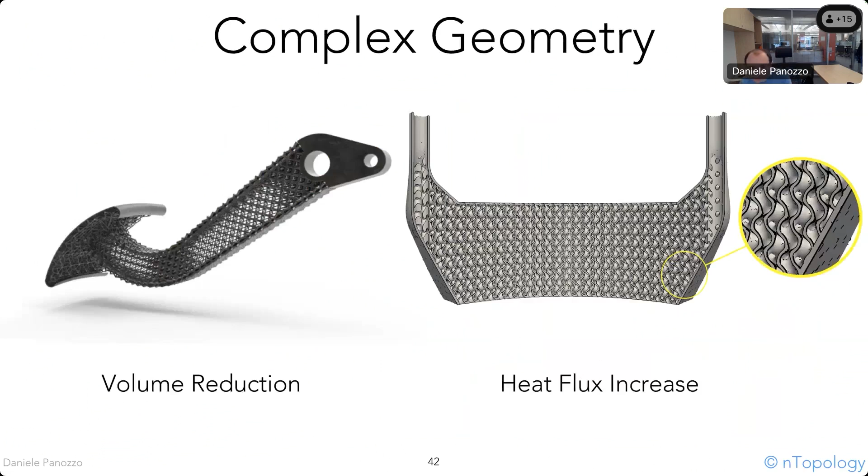For these sort of things, we now have a new system, which we are developing as a plugin for 3D Slicer, where you have an image that's already segmented, and then you specify a map of which materials are supposed to touch and which are not supposed to touch. Then we have a way to generate meshes with these topology constraints enforced. Okay, so that's how we deal with this.

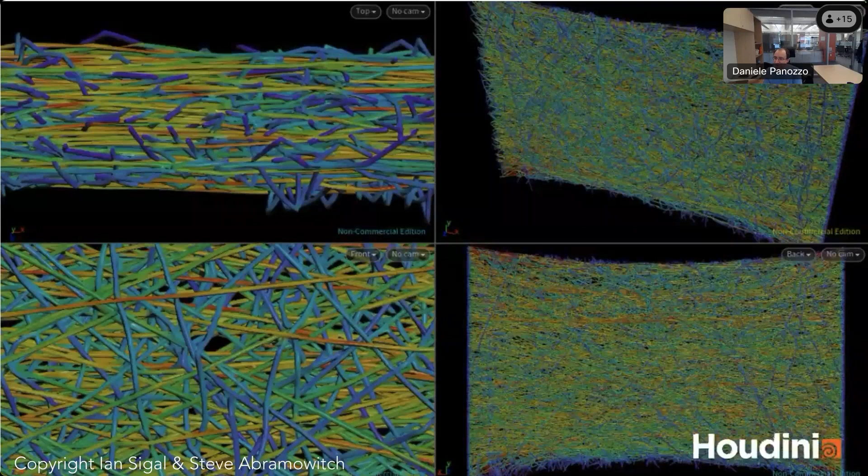I know that there are many models with overlap, but unfortunately it's really ambiguous, right? You can always construct a model where it's completely impossible to recover from an existing overlap. So my take is that this should be solved on the modeling side, getting rid of them instead of trying to deal with them later on.

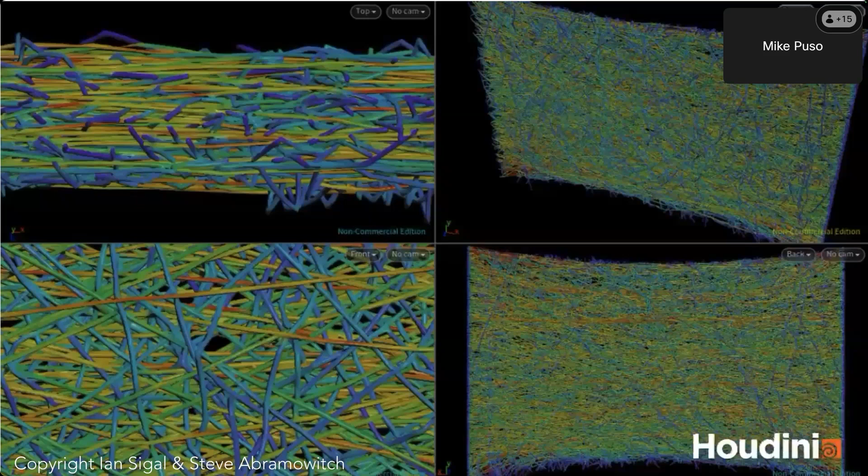And then I have another comment, because there's a difference between collision detection and doing a consistent approach for transmission of stresses across the boundary. When you do these collision detections, you have a bunch of tetrahedra, and when you look at the stresses on them, they're not going to be smooth because of the way the stress works. So we bend over backwards to do these mortar approaches or other kinds of approaches, which wouldn't be as nice to a large degree on some of these problems, I suspect.

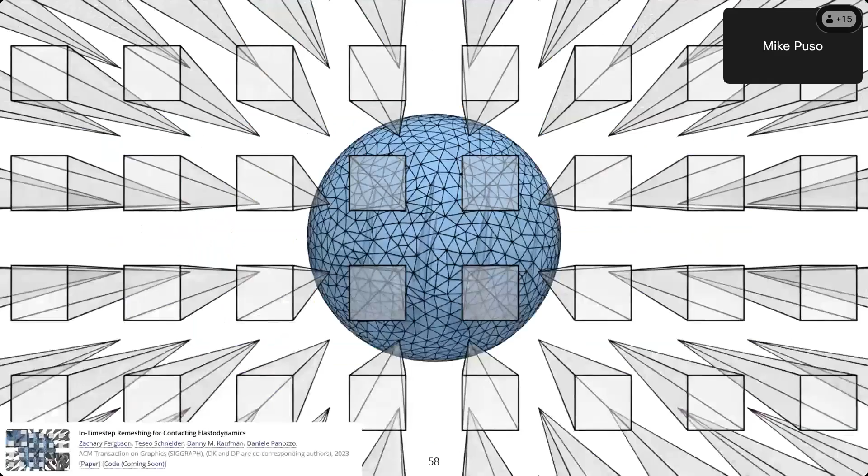I guess the question is, you don't look at stresses very often in a lot of your calculations, and a lot of them you don't probably care, but there are some where we do. For instance, one of the things is that yes, you never penetrate, but sometimes you have to drive those curves together, using something like an interior point method. We kind of need that. We can't get away with just keeping everything from penetrating. So it's a little more complicated from the engineering perspective than just saying we don't want anything to penetrate or collide. We actually need the right stresses at these interfaces. It's more of a comment than anything, because if it's an animation, I don't care, right? And that's part of the thing.

Thank you for the question, this is a fantastic comment. If you have data, I would love to try this, because we do care about getting this to match reality. In some of the papers we actually have tests on microstructure compression, and I think those don't have a problem. Yeah, those are good, it's mostly geometric in these cases, but there are simple cases where you look at them and go, geez—especially with tets, you can get some really bad stresses where tets are basically trying not to overlap, because you're not getting a consistent pressure across the two sides.

So, fighting back a little on this: with general contact models, I agree. But ours is actually C2, a smooth contact model. You can think of it as having, around an object, a sort of pillow, which you can make as thin as you want—you can go down to like 10 to the minus 6, 10 to the minus 7. In there, the contact is smooth, so it's not discontinuous anymore. The collision detection is done between triangles, of course.

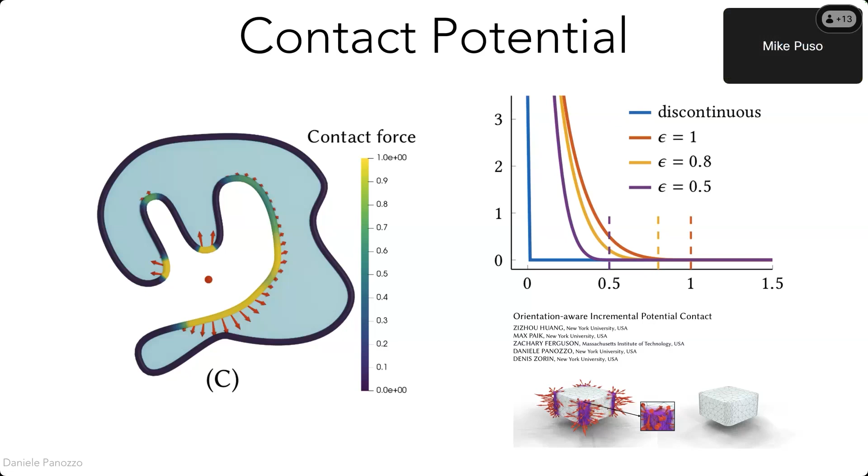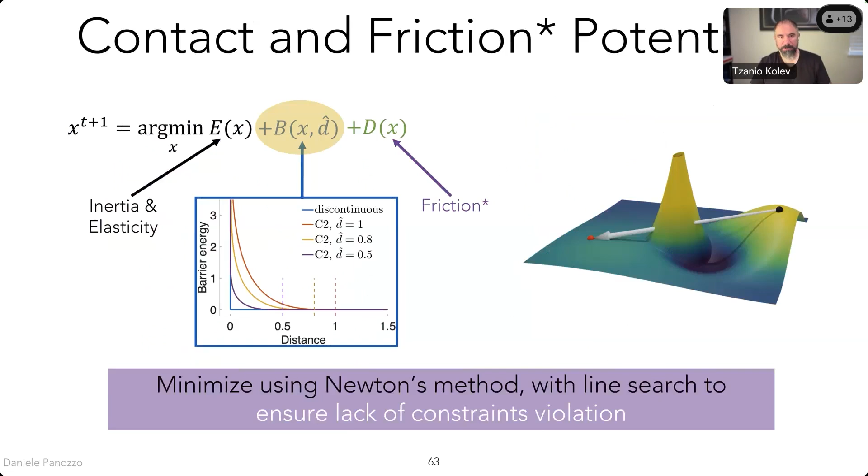In 2D, maybe. In 3D, for a tetrahedron, maybe, but not with this precomputation. We require some smarter way to do it. For a cube, there is no hope. Okay, this is a problem of interest for us. I know it's hard, but it's maybe something to look for in the future.

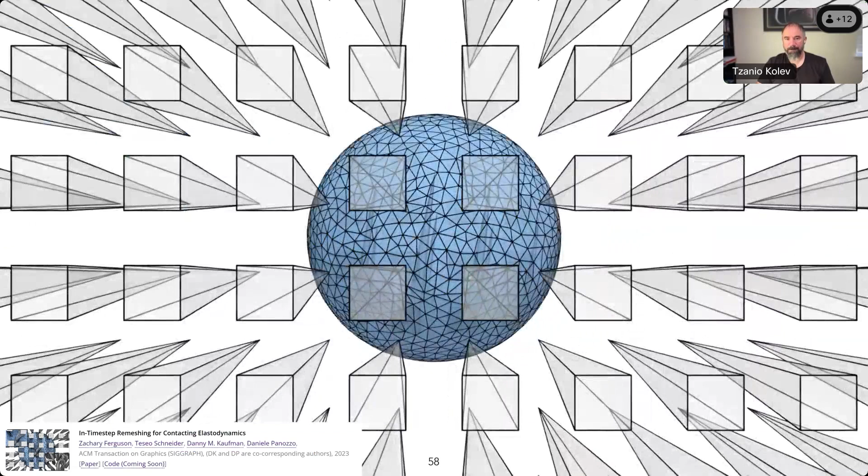And the other one I wanted to ask real quickly, you mentioned differentiability. That's really interesting also for us. This was all in PolyFEM, is that right? Yeah, that's right. And the differentiability, is this a Python code? Is that how it's done, or? For now, it's C++, but as of last week, we have a Python interface for all the differentiable stuff.

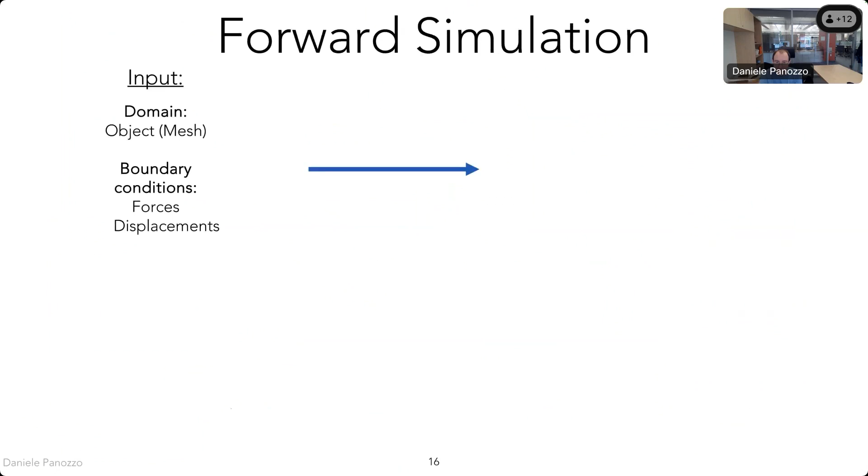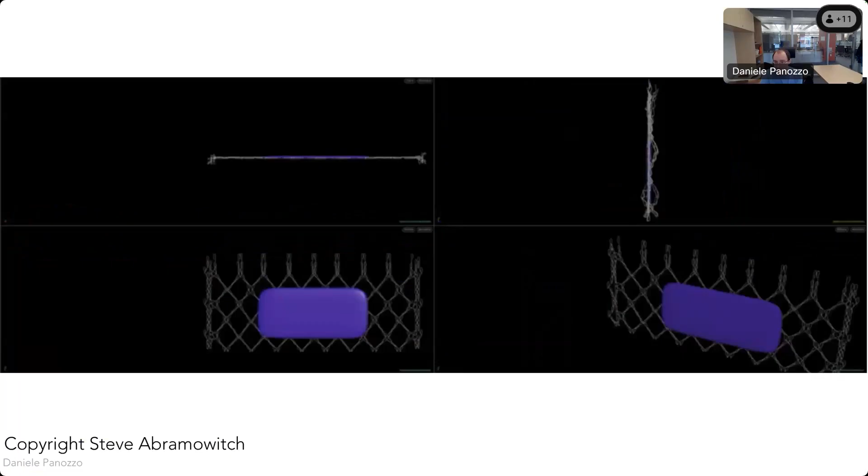So what's your method for differentiating the code? Adjoint. It's an adjoint derived analytically on the continuous formulation, and we discretize after adjoint. Okay, thank you. And that was a lot of work, but Denis Zorin is... Yeah.